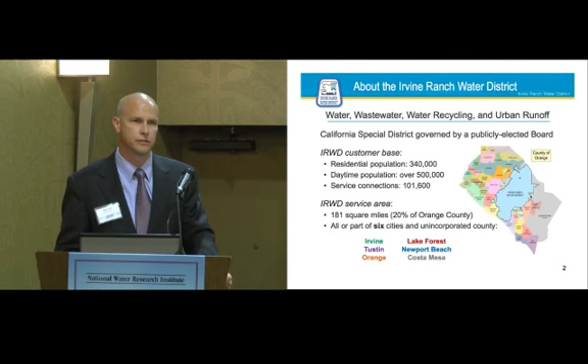The agency itself, on the potable water side, we do potable water. We serve water through primarily a well system. We have MET water as a source of supply, but we have 3 treatment plants, 25 wells, about 1,500 miles of pipes. On the wastewater side, we have about 1,000 miles of sewage collection pipes.

And I guess I'm one step ahead of you, Tom. I did take the wastewater part, I put the treatment part into the recycled water genre. So we view it exactly the same way as our good folks in the Inland Empire do, which is it is a resource to be reused. We've been recycling, as many of you know, for many, many years.

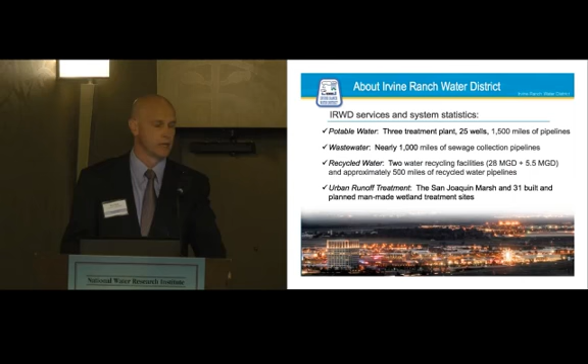We have 2 water recycling facilities, the 28 million gallon per day facility and a 5.5 million gallon per day facility. I'll talk primarily about the 28 million gallon per day facility, which we call the Michelson Water Recycling Plant. We also do urban runoff treatment, low flow treatment through a series of ponds. That's probably a whole other couple of presentations, but that's another part of our core function at IRWD.

So getting into the project objectives for the Biosolids project, quick look back on our history of solids handling. In the 60s, 70s, and 80s, like most treatment plants, we had your typical activated sludge plant, and then we dewatered our solids and we found a place to put them. And back in those days, obviously, regulations were a lot more lax, and we were able to do that much easier. In 1988, we began piping our solids to the Orange County Sanitation District.

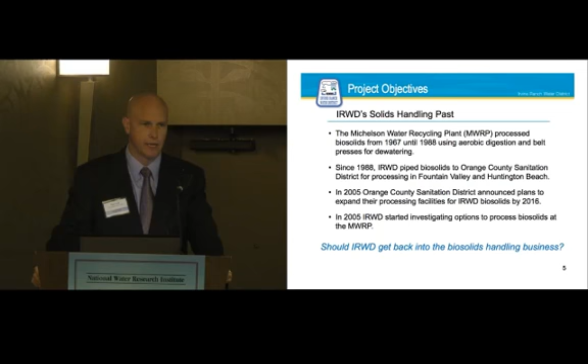We had the means and the infrastructure to do that relatively easily. We also had a pretty good pricing structure from the Sanitation District. They basically charged us on a per gallon basis, similar to what they would charge us for sewage. Some of our sewage from our service area would flow to the Sanitation District naturally, so we had this arrangement. But we were actually getting a pretty good deal if you think about what we were sending down the pipe as sewage versus dewatered solids, a lot more strength in that solids.

In 2005, Sanitation District said, "Hey, you're getting a pretty good deal on that." And they also wanted to begin expanding their facilities and realized that as we continue to expand in our service area, they need to build new facilities. So before they launched off on their next expansion, we said, "Time out. Let us take a look and see if as an alternative, we could treat our own solids at our site."

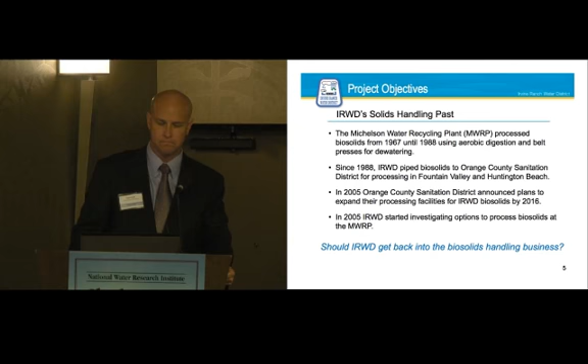So a little spoiler alert. Yeah, we did start to think about doing that, and that's why I'm talking to you today, because we're in fact undertaking that now. So we're going to get back into the biosolids handling business. The objectives of the project were really to institute improvements that would allow us to efficiently and sustainably use the renewable resource that will result from this process. Definitely want beneficial reuse on the solids, but also on the biogas. We did see that as a resource as well, with the alternative being flaring or other things that weren't quite as beneficial.

We wanted control. I think anytime you're a utility, there's a high expectation on the part of your customers that you have some degree of control. Sanitation District was great to work with over the years, but they have their own set of challenges on a grander scale. We do anticipate working with them forever because of how we're connected to them, but we felt that control over our own destiny in terms of solids is a much better place to be. We certainly wanted to minimize the environmental impacts, and then construct a solids facility and energy recovery facility that would address our needs going forward through our ultimate build-out phase.

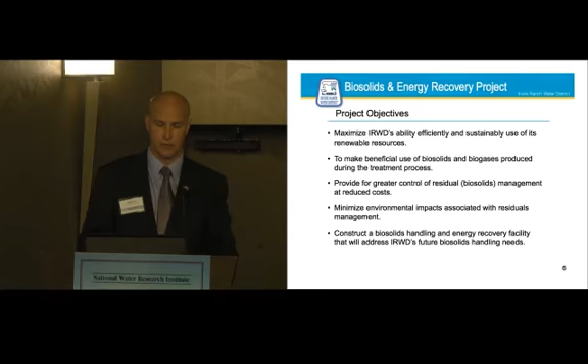We looked at a number of different alternatives, but let me lay out a roadmap here and kind of construct the whole picture, and then we'll get into some more specific alternatives. We have primary sludge and waste activated sludge, and we send that to Orange County Sanitation District. That's our traditional model. And then we considered, well, we could do the thickening and anaerobic digestion ourselves. We could stop there, and then again continue sending those solids to the Sanitation District in a different form.

We could then layer on perhaps a raw sludge dewatering process and use composting, incineration, or e-fuel conversion. Or we could get right into treating the solids into what's referred to as Class B, which is an EPA designation of a quality of solids that allows you to dispose of them in a certain way. The options are listed down there: composting, landfill use, land application, and different things like that, or sending them off to somebody else to dry and use a different way.

Or go to Class A. This was another consideration that we took into account. And we looked at Class A being a much higher quality, as the name would imply, local fertilizer, working with a partner to dispose of the fertilizer product at the end of the day. You could still incinerate it, and you can also use it for e-fuel.

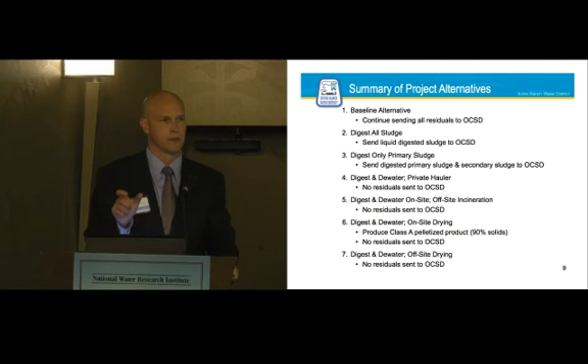E-fuel is a fancy word for it's not coal, it's not natural gas or some other. It's an e-fuel, so it's kind of a beneficial reuse. It's not the best, but it's a fuel source for things like cement kilns and other folks who burn locally. Not locally as in the South Coast Air Quality Management District, but locally, it's like just outside the South Coast Air Quality Management District. Define local in that context.

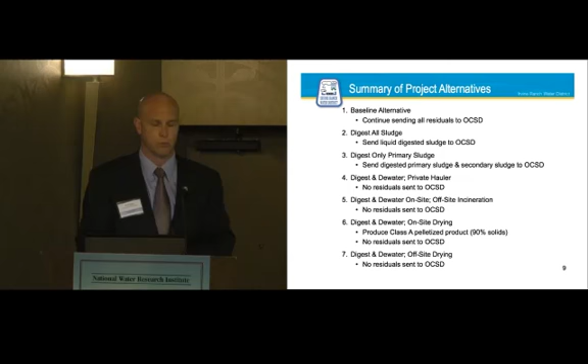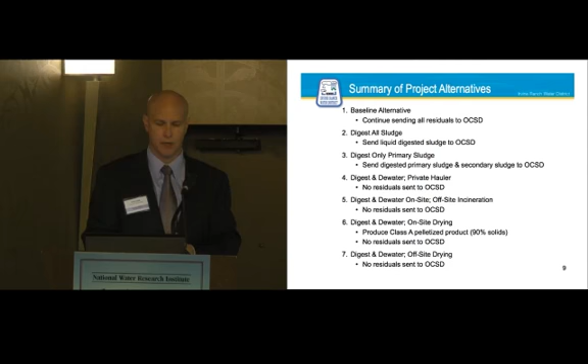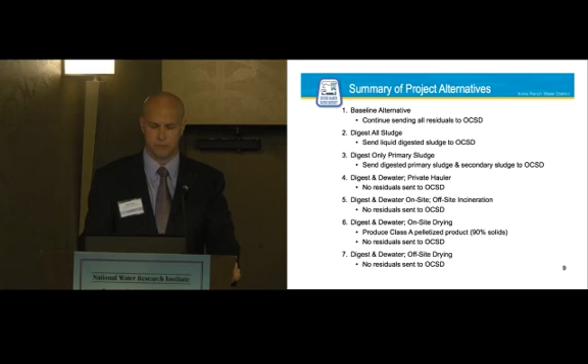We really developed 7 different alternatives, and I won't go through them all, but I did highlight in bold, if you can tell, number 2 and number 6. The baseline was sending it to the Sanitation District, and we realized we probably can do better than that. Digested solids were a little bit better on that arrangement because the digestion would allow us to have use of that biogas that came off that process. So it came down to really an analysis between number 2 and whether we wanted to go all the way with alternative number 6, which is the pelletization, and really no residuals being sent to Orange County Sanitation District.

So going through the different alternatives, on the cost side, we had capital costs and operating costs, which we tried to bring into a uniform across the board comparison so that we could then do a payback analysis, whether we would just keep going along with the Sanitation District on what would essentially be a leased arrangement with their facilities that we would then be paying every year. So we knew we had something to compare against. And then if we were in fact to build our own facilities, what would that payback look like?

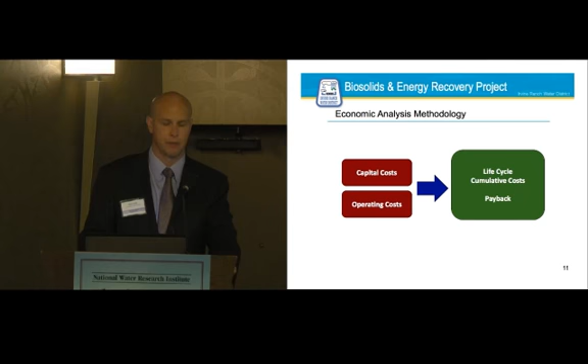So here's the cost, and you can see, we didn't show it before 2010 when it was relatively inexpensive, but you can see the costs increasing over time. And this was a study that Carollo had done in partnership, on behalf of Irvine Ranch Water District and the Sanitation District. We have a good enough working relationship with our partners at the Sanitation District. We felt that having one consultant prepare this as a neutral third party to tell us what these costs would be, and we were both very satisfied with the results in terms of the quality of their work product.

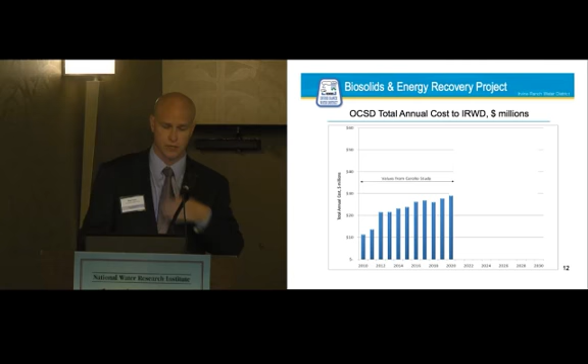But what ended up happening is we could look out into the future, and as we look way out in the future, it does start to get uncertain after 2020, and so we had higher escalations and lower escalations. But regardless, these costs will continue to go up in the future as far as cost to us. So we looked at the high and the low of the alternatives, where those lines started to diverge a little bit, and you can see the cumulative costs, and I believe these are in 2012 dollars or 2010 dollars at the time.

So $702 million, $632 million, and those were for alternative 1 with the sanitation district. And then you can see alternative 6, which was the pelletization energy reuse version, $414 million as cumulative costs, with a payback year in 2023. So again, we had some pretty good data, and we knew we would be looking at some kind of a project. Just what technology should we deploy to make this work to our advantage?

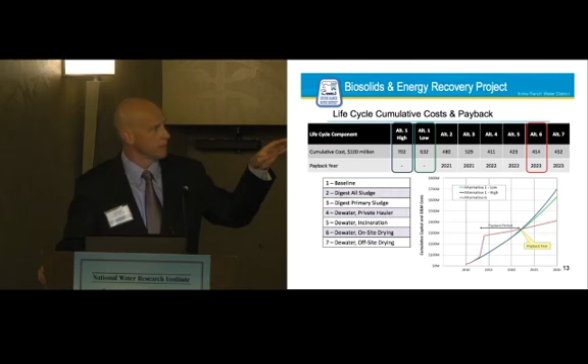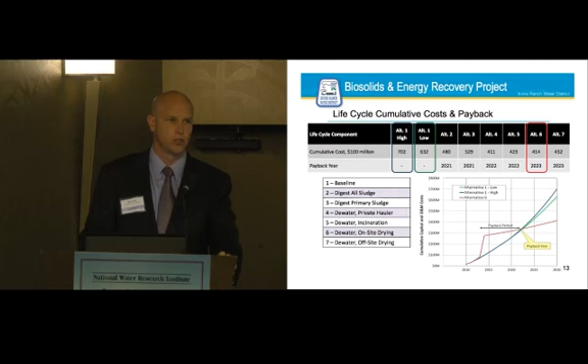If you're studying those different numbers, you're probably noticing that there's actually one cheaper than the 414. There's some more expensive as well. And I will definitely touch on why we chose a project that wasn't ultimately the lowest cumulative cost, strictly on a cost basis.

Non-economic evaluation criteria. This is how we get there. Once we got into the realm of, okay, now we know what the costs are, ballpark relative to each other. Well, more than ballpark, we spent a fair amount of time on them. But we also wanted to consider the non-economic evaluation criteria. So we came up with some non-economic criteria that were important to the agency. First being autonomy. I touched a little bit already on autonomy and our ability to be independent in our biosolids management decision making.

Implementability. This really gets down to the ability to put in whatever we were going to do in terms of getting permits. A lot of times we think about great new technologies, but the regulatory agencies are about 10 years behind us. So it doesn't do much good to construct a facility when you can't get the permits for it. So we considered implementability as a non-economic criterion.

Community impact: our treatment plant, which I'll show you a picture of the site in a minute, is right in the middle of Irvine, and there are considerations for noise, traffic, odors, and other things. Environmental stewardship: we did want to end up with a product that would be the right thing to do environmentally. Technology, not only implementability, but proven and reliable technology, very important to us. And then long-term viability, staying one step ahead of the regulations in terms of our final product.

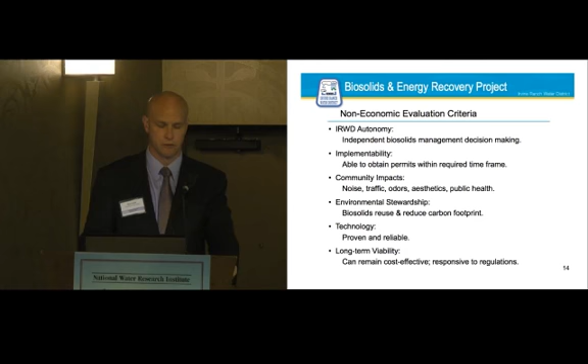Going through the exercise on the non-economic criteria was actually quite interesting because it was a little bit subjective at times, but we felt we came up with a pretty interesting methodology by which we were able to rank the different non-economic criteria on a 1 through 5 type scale. And you can see there are some definite benefits to the baseline alternative number 1, but there were also some definite benefits to number 6.

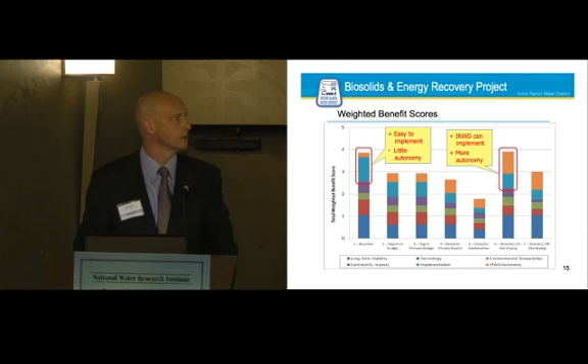So we looked at what was really driving number 1. It was easy to implement. You just call the sanitation district, say here comes some more, and write them a check. But we didn't have the autonomy we were looking for. If you look at alternative 6, it was still relatively easy to implement, not quite as easy, but we're not afraid to take on new projects and new technology at IRWD. So we felt very comfortable with the project we came up with. And we had substantially more autonomy, so we scored better in that category.

So then we took the economic criteria and the non-economic criteria and layered them onto each other. You stand back, and the answer sort of falls out for you. The line is an indication of the economics, on the far right y-axis. Those are the dollars, and the bars are the non-economic. So when you see a low-cost project with a high non-economic outcome, you say there's your winner. And our winner in this case was alternative number 6. That's how we came up with the selection, benefits and life cycle costs combined.

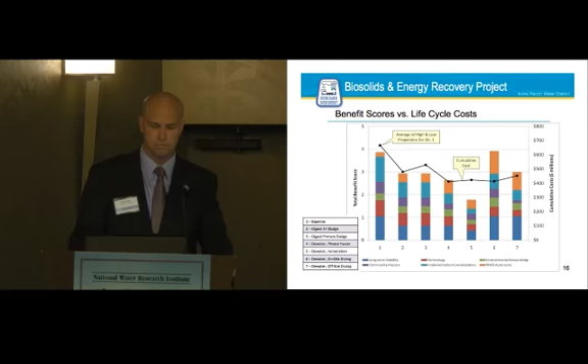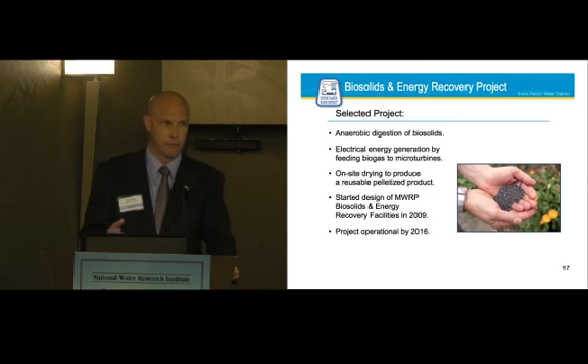So the project we selected has anaerobic digestion of biosolids. It will produce electricity. It will produce a pelletized product, as shown by the person holding it right there. We started the design back in 2009 and hope to have the project online by 2016. That's a quick overview. The benefits of the project: greenhouse gas effects are lower by using the pellets locally.

We do have a reduction of the truckloads of product that finally end up leaving our plant. We're not shipping water out of our facility, we're shipping almost all solids out of our facility when we end up with the final product, so that's a good thing. It does beneficially reuse the product as either fertilizer or a fuel. Greater environmental stewardship, so we check that box. It does result in a lower overall economic cost to the community. If you remember back on the chart, the 700 million cumulative cost versus the 414, so it is still beneficial.

And it really positions, this is an important thing for IRWD relative to our community. There's a high expectation of our customers to be positioned as a proponent of sustainability, and the city of Irvine shares that ethic also, and they share it so much we actually called them out on it. We had a meeting, I believe it was a day or two ago, right after lunch with the mayor and the mayor pro tem as part of our normal meetings, and we actually had a sample of the pellets, and they actually smelled it, and they did okay with that.

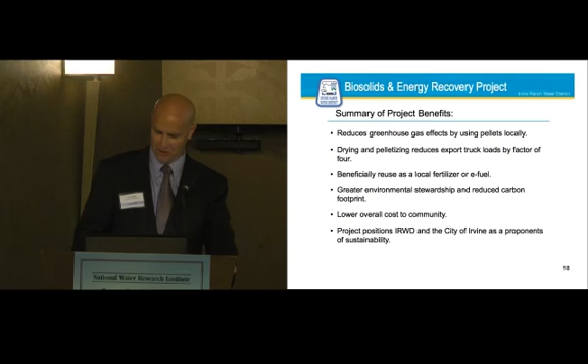So describing the project, we'll have biosolids dewatering, and then the gas, and then the odor systems handling. Again, we wouldn't be exporting any solids to the sanitation district. Another element of the project is that second treatment plant, the 5.5 MGD facility in the next town to the south of us, probably a 15-minute or so truck drive. We would actually be able to take the solids that accumulate in that plant. It's a facultative pond process, so a little different than a waste-activated sludge, but it does have solids. Those would be dewatered with centrifuges and then trucked up to our dryer facilities. So from both of our plants, we could result in a pelletized product.

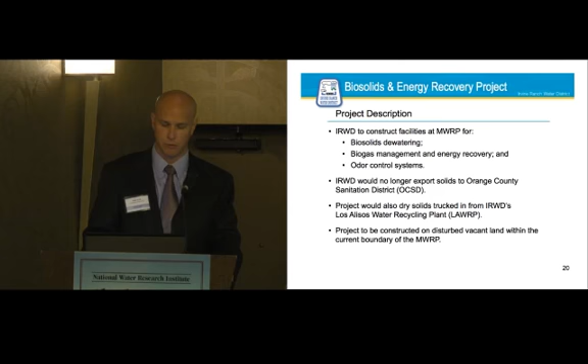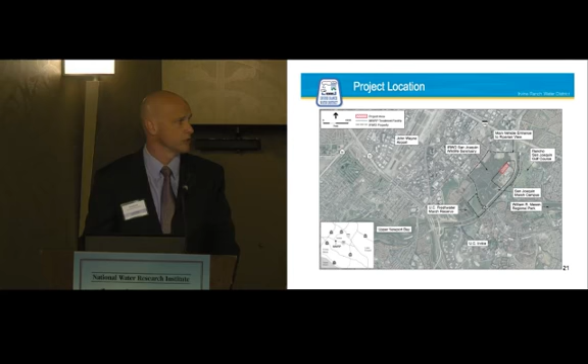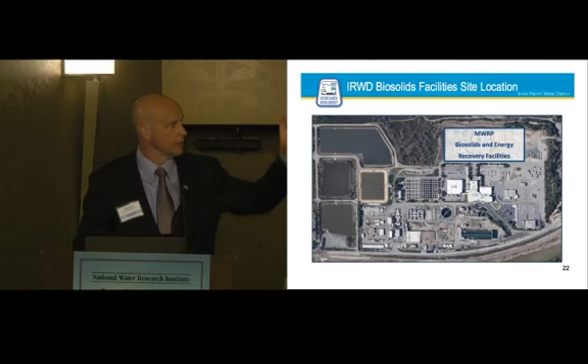A little more close-up view of our facility. A lot of this has changed. We are constructing about a $100 million expansion to our facility right now to take us from 18 or 19 MGD up to 28 MGD. So a lot of this is disturbed and looks a lot better than this slide shows. But you can see our biosolids facilities will be just to the, I guess, west of the plant, but still within the plant.

So here's the schematic for what we came up with. I'll talk slowly so you can drink it all in and understand it, but it's pretty straightforward. Once you get through the clarifiers and then the thickening centrifuges, it goes into your typical digestion processes, an acid-methane phase digestion that does generate the gas. But what happens after the digestion is that it goes into the centrifuge.

At that point, that would be considered Class B sludge. So we could theoretically, if there was an issue or downtime on the dryer, very easily ship that product off to wherever our disposal options would be at that point. And unfortunately, with Class B, you kind of have to use the term disposal because the way the regulations are set up, it's not as easy to handle that product and use it beneficially. But with Class A, certainly much more beneficial reuse opportunities.

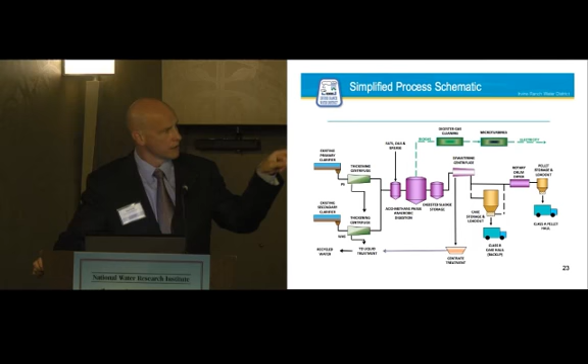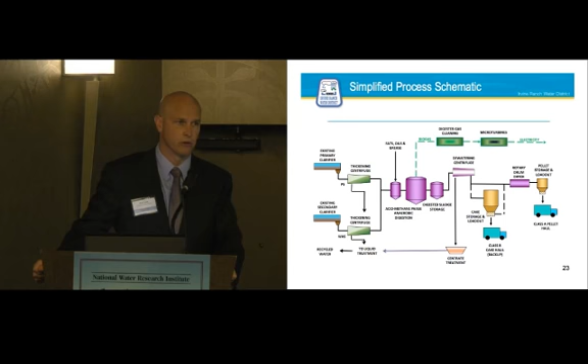We go through the dryer, and unfortunately the dryer is a little tiny purple box there, but it's pretty much driving the whole project. It's a very substantial portion of the project, and it really is the heart of what we're trying to accomplish in forming the pellets. After the pellets get formed, then they would be loaded out to trucks and hopefully used on HOA, homeowner associations, city property is what we proposed to them yesterday, and then other folks, even our own property.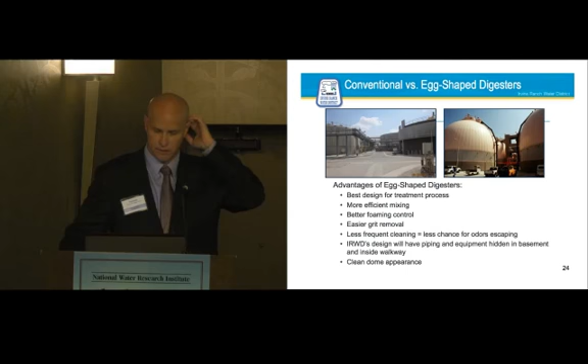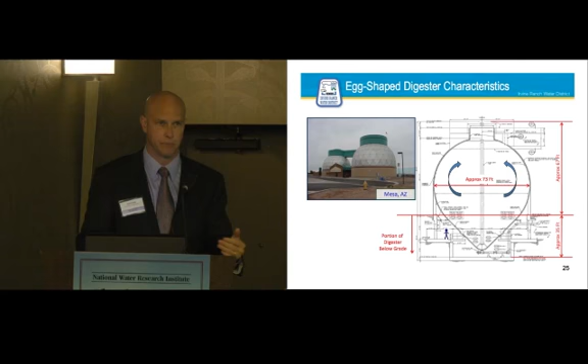A quick view, a side view of the main thing here. You can see the circulation process. Again, you're probably all familiar with that. But it's remarkable how deep these things end up going, and it's still about 65 feet tall. So that was a consideration. We like to reference Mesa, Arizona. It's not going to be designed exactly like that with the geodesic-looking connections, but all of our pipes will be contained also. And Mesa was a great project for us to compare to because it's the same dryer, odor control issues and things like that. So we had kind of a guideline to go by.

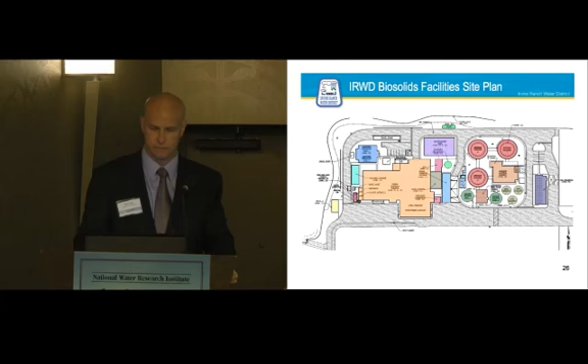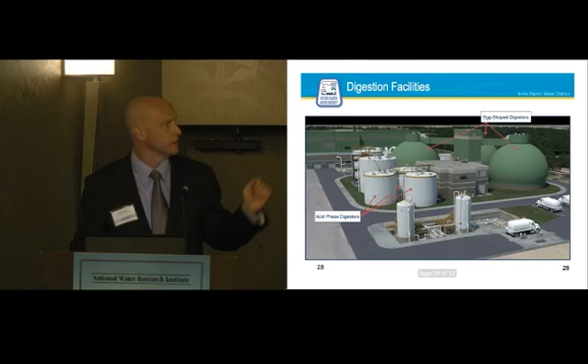Again, here's the plant, the biosolids portion of the plant with the dryer building, the main boxy area, and then digesters off to the side. I'll go quickly through these pictures here. I have a little video at the end I can show you, kind of a fly-through in the building. I'd rather do that than spend a lot of time on these. Get a feel for how large these facilities are going to be. The building itself is about 70 feet tall. Some inside views.

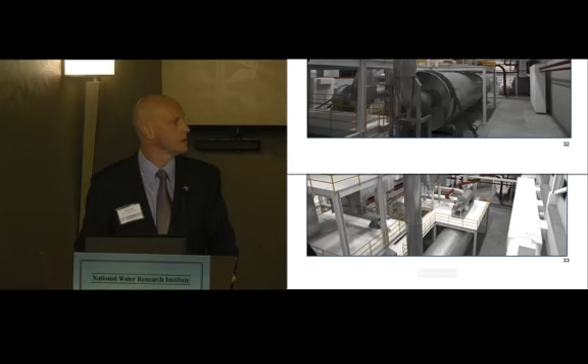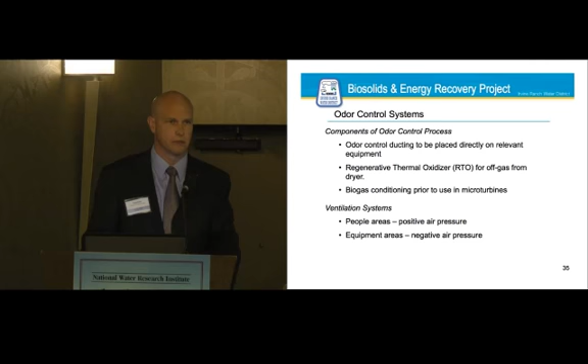Dryers, upper view. So the odor control system, the components of the odor control system, really it's the odors, the H2S that are coming out of the different areas, whether it's the bagging area, the load-out area, the load-in area. There's lots of areas that are going to have some odors associated with it. The regenerative thermal oxidizer for off-gassing of the dryer is another component. And then the biogas conditioning prior to the microturbines. But basically, a very robust system that will keep the staffing or the people areas, as we call them, in positive air pressure, and then the equipment areas will be in negative air pressure.

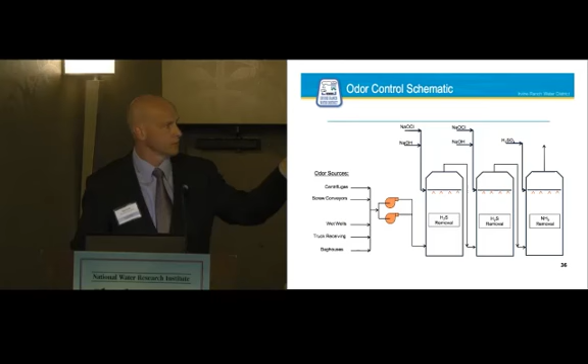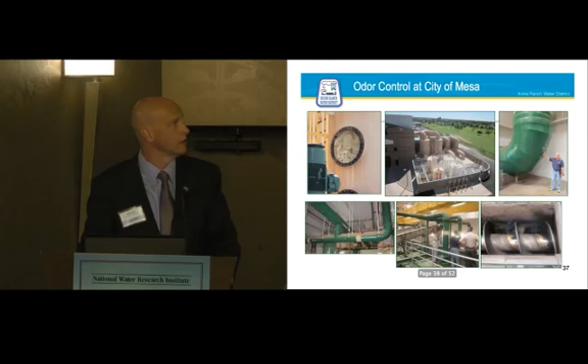On biogas utilization, we really considered 3 different cases here. One was basically using the gas primarily for the dryer and for the boilers. The boilers would then provide some heat back to the digesters to promote that process. It doesn't get terribly cold in Irvine, so it wasn't a big demand on that boiler. We would result in some extra gas that would eventually just be flared off. So we considered that as kind of a base case scenario, low cost.

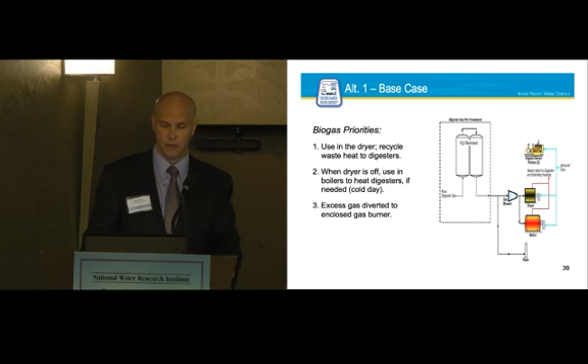Then we looked at the fuel cell alternative, and at first we were quite excited about this, but with the fuel cell there was a similar sort of non-economic evaluation, and reliability was a big driver with the fuel cells. I know fuel cells have been implemented very successfully, but we were frankly on the tail end of the rebate programs that have been very popular and beneficial to folks. I believe Inland Empire has fuel cells, right, Tom? Yes, so they are in place and working.

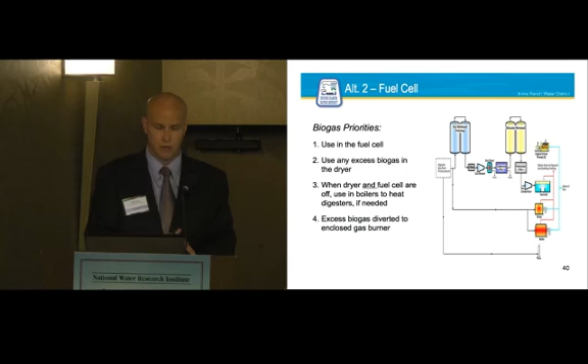But we felt for our process, the way to go was going to be microturbines, proven technology, very reliable, and again works economically as well as in the non-economic criteria. We'd still use some natural gas to supplement the dryer as well as the biogas.

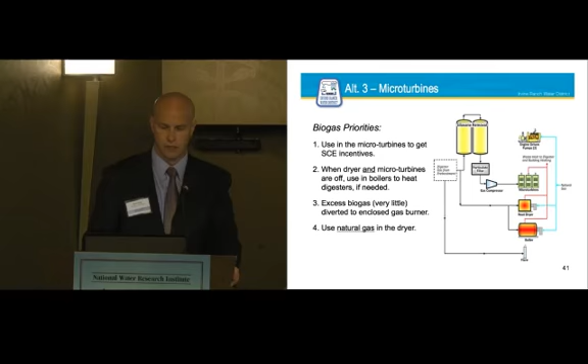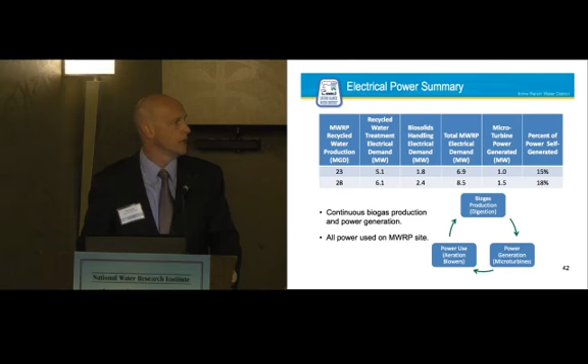Here's a quick idea of how much electrical power we need, kind of skirting from left to right, about 6.9, currently at 23 MGD, but in probably the 10-year time frame, 28 MGD, we'd be up to 8.5 megawatt demands. And that's about 18% of our demands could be met in about 10 years. And we're also looking to bring in other sources of fuel, if you will, for this gas generation project.

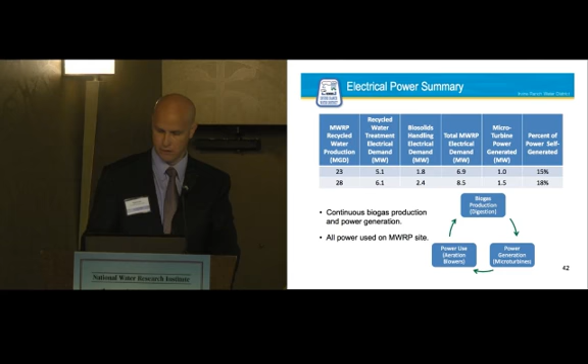Pellet marketing. We have done a study with the goal of maximizing our use of the pellets locally in a very beneficial way. So we have areas identified. Large square, dark green is the Great Park. You might have heard of the Orange County Great Park. Substantial commitment by the region to have a lot of parkland over there. Hopefully we can use them as a customer.

And then a number of other sites have been identified. But again, we have begun talks with the cities, but we're still a few years away from actually having finished product. But this will certainly be one of our focuses in the future going forward.

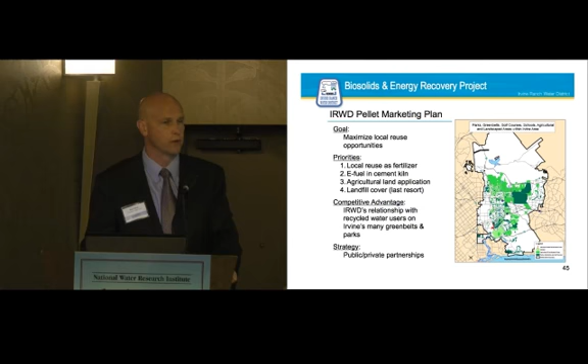On the schedule, just last Monday, our board certified our EIR. The City of Irvine will be having a hearing in 2 weeks on the conditional use permit required for that nice tall building and those tall digesters. And then we expect construction to take place over about a 3-year period. We are out to bid right now, and hopefully we'll have startup by the early part of 2016 for the Class B and then the Class A.

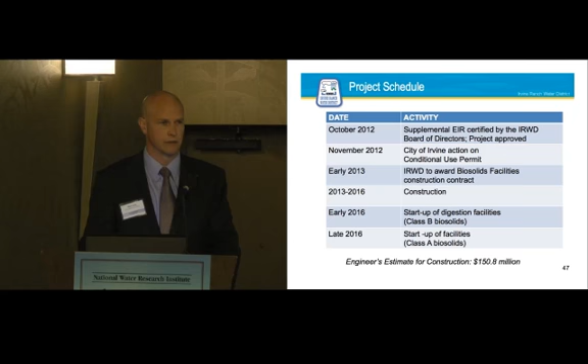Our estimated construction cost for this project, just on the construction side alone, is about $150 million. So again, we're just finishing up our largest capital improvement project in the history of the agency, and we're undertaking the next one on the heels of it.

Research opportunities, a couple terms you might recognize. OpenCEL, it's a cell lysis technology, or a cell explosion technology that bursts the cells in a way that releases the carbonaceous material, and it actually results in less solids and a higher production of gas. It's something that we considered, but we thought we can implement that at a later time. We were first focused on getting a project constructed that our staff could be very comfortable with and operate reliably.

Ostara is a phosphorus removal technology that can concentrate phosphorus. We looked very hard at Ostara, realized that for the amount of phosphorus in our sewage, it probably isn't there yet, but as phosphorus costs increase in the future, there could be an opportunity for a future implementation of an Ostara system. Food waste is an interesting one, probably the most exciting of the three.

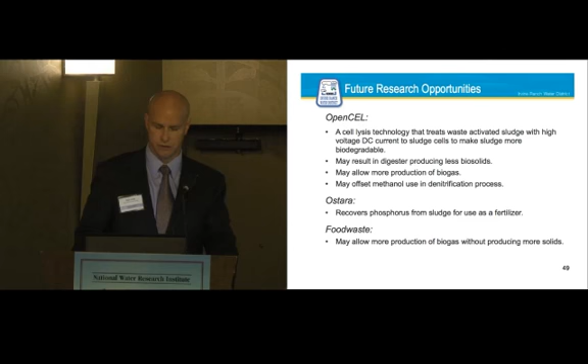Food waste is a fancy word for taking the food in the trash from a cafeteria, say at a university or restaurants in the area, separating out the non-carbonaceous material, getting it into a slurry form, having that brought in, and putting that right into our system, where it'll serve as a fuel source for our digesters and generate more gas. We are going to have a fats, oils, and grease station, or a FOG station. That will be a really great way for us to get more gas coming out of our system at the end.

So this is a shameless plug for Dr. McCarty's students. Apparently a number of our project team went to Stanford, so if there's anything wrong with this project, we can always go back to Dr. McCarty, who's coming up next. We'll blame it on him.